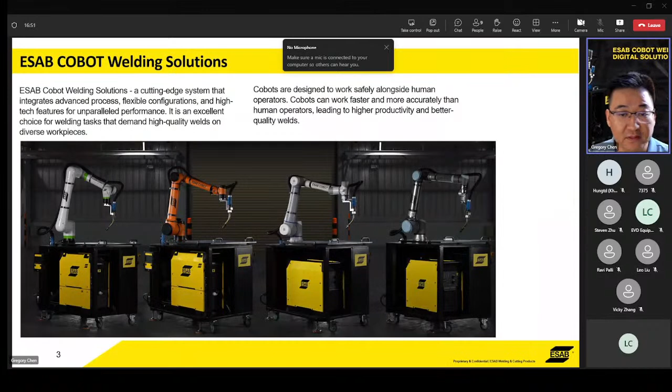As you can see from this first slide, this is generally our product for ESAB Cobot welding solutions. We include different configurations of the Cobot arms, different power sources, and hardware configurations. And as everyone knows, the reason we want to launch this new product to the market is because in recent years we've had issues like a shortage of welders and a shortage of qualified engineers.

With Cobot solutions for welding, we can increase the numbers of machines to replace manual welding, and of course increase the productivity of the welding process. Also, with the numbers of these Cobot solutions increasing, the price of the products keeps going down, which makes it affordable for owners of small-size shops to have this kind of solution to help reduce costs and increase productivity. So that's basically the reason we launched these products to help them, and meanwhile we can increase our value of revenues.

So the ESAB welding solution is a cutting-edge system that integrates different kinds of processes and flexible configurations, along with high-tech features, including our own ESAB products. It's a very good choice for welding tasks that demand high-quality welds on diverse workpieces. It's designed to work together with people—that's why we call it Cobot, collaborative robot.

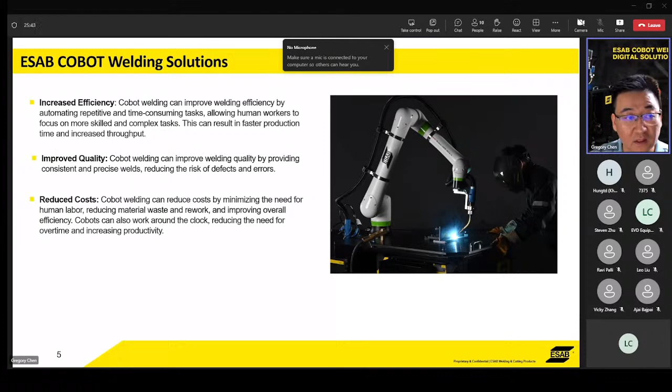Cobots can also work around the clock - 3 shifts, 2 shifts, depending on your workload - and they don't need to sleep. This reduces the need for overtime and increases productivity, and in the end it's the same result: reduced costs. So those are the 3 benefits of the Cobot welding solutions.

Next, enhanced safety - that's one of the biggest features of Cobot welding. For robot welding, the industry robot, people always worry about safety, because that thing can really injure people badly, and sometimes can even kill people. We've heard a lot of news about this.

So for the Cobot, the reason we design it is that it can collaborate with workers. If you touch the Cobot, or the Cobot touches you, the system will respond immediately the next second and stop immediately. This reduces hazardous tasks in the workshop, such as welding in confined spaces or high temperatures, so you don't need to worry about safety.

The Cobots also have different safety features - we put in sensors that can detect when a human worker is nearby, depending on which model and options you choose for the safety measures. This can immediately slow down the process and prevent collisions in the next seconds. So enhanced safety is definitely a feature of the Cobot.

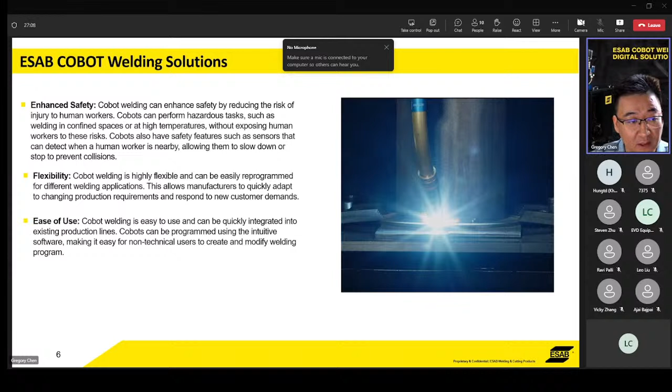The next one is flexibility. Cobot welding is highly flexible and can be easily reprogrammed for different welding applications, and we designed it to be as compact as we can.

The benefit is that you can have this trolley-type design Cobot deployed anywhere in your workshop, easily deployed near your workplaces. This allows manufacturers to quickly adapt to changing production requirements, and it's easy for programming.

For different kinds of product structures, you can easily do what we call dragging programming. The operators take up a couple of minutes, typical time to do the programming. So it doesn't matter how many kinds of products you have, it's easy and good to go. That's the flexibility, either from requiring limited space in the workshop, or from handling different kinds of products. The next one is easy to use.

As ESAB, we design a lot of templates for programming that's embedded in the system. We want to reduce the programming work as much as we can and provide ease of use to the customers, so it can be quickly integrated into existing production lines and take less than a couple minutes to do the programming. It also uses very intuitive software, so you don't need much technical background. Anyone in the workshop with a little welding experience can create and modify a welding program. That's a very good feature for customers.

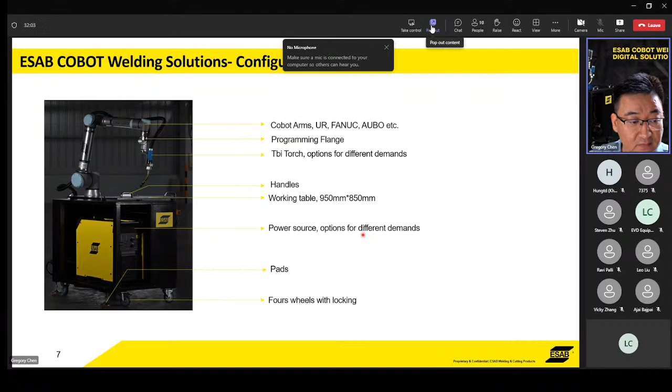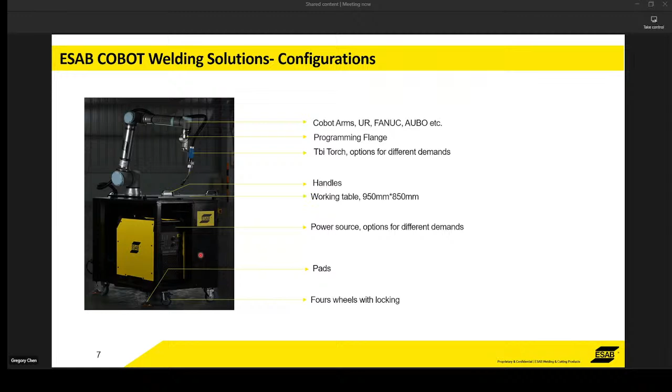Then we have the pads - you can see two here, and two more, so four pads total. When the trolley is in position and ready for welding, we always lower the pads to the floor to make sure the trolley has good contact with the floor, keeping it stable during the motion of the Cobot. We also have four wheels with locking functionality, so when it's in position it locks there, again to ensure a stable position with no vibration during welding.

And then we will look from the back side of the whole machine. Here is the copper grounding point. You will connect your ground clamps to this point. This point can move to anywhere on the table, so if you have some bigger size parts, it will be flexible to anywhere and will not prevent any space of your parts.

Then we have the W82, that's the welding data unit. This configuration is for Aristo 500iX, and W82 is the communication box for talking to the Cobot. It supports different communication protocols like Ethernet, EtherCAT, Ethernet IP, DeviceNet and ProfiNet. So it can work with different kinds of arms, either Cobot or robot. That's a very typical ESAB product for robotic solutions.

And then we have the U82, that's the touch pendant, or we can say control unit. All the parameters are set up to the power sources via this U82, and you can set up the voltage compensation, the control of the wire speed, the different arc-on and arc-off parameters, and also set up different processes for different material. We also have the synergy lines embedded in this U82 that allow you to work in a smart way.

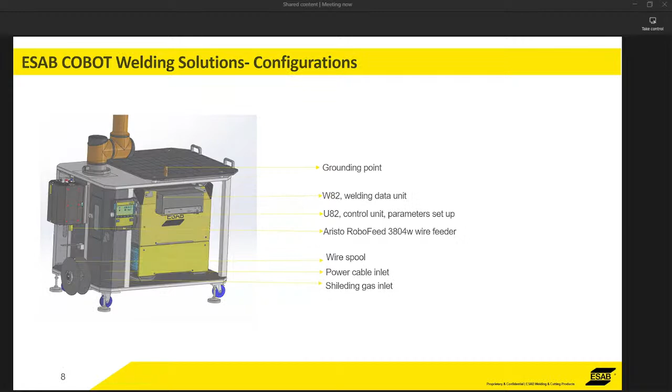So next one is the introduction of each sub device, like the power source. That's very standard from ESAB, the classic power source is the Aristo 500iX. I will not go into this number by number, because this is our standard equipment and these are the specs. You see the mains voltage, and the process support is MIG and MAG, and most of the time we use this for the Cobot welding process. Then the open circuit voltage, the power factor, and of course it depends on the requirements of the customers.

We can have Cool 2 cooling unit, so it's integrated with the power source together as one unit. And sometimes if the welding process is not that heavy, we can also provide just the Aristo 500iX as the single power source. So it's a portable heavy industry power source.

It supports different kinds of process. Besides the standard, like pulse and super pulse to reduce the spatter of the welding process, it also applies for aluminum, titanium welding, different kinds of material it also supports. So it's a very good power source.

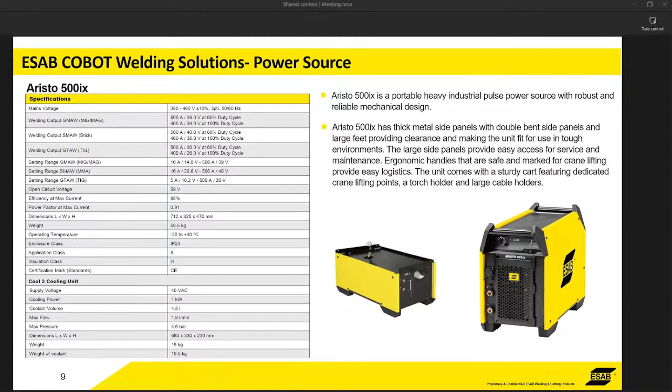And with the Aristo power source, we also have the Aristo RoboFeed 3804W wire feeder. So this is the one to work together, and with these specs it's almost a very standard product from ESAB. You can see here the voltage 42, and this voltage is supplied by the power source - you don't need to have a separate power source.

And you will see it's speed control, it's pulse encoder, so you will have very accurate speed control according to the demands of the PLC or robot control. Wire speed is very stable and fast, up to 30 meters per minute. And it will work with different kinds of material, wires, and different sizes of wire, with standard torch connections, EURO.

And these are basic, very general standard data for the spec and order information options. Of course, you can have different either air-cooled or water-cooled interconnection cables between the RoboFeed and also the power source. So the design is very robust. This can work anywhere in the workshop. You just put that to work as you expect it.

It's four roll wheels design in its feed mechanism, so grooves in both feed and pressure rolls give stable feeding and low wear of the wires. This is a very good design compared to the previous generation, that's the 3004W. One thing is that the whole package is delivered with these rollers. So when you order, if you want extra, you order one set of rolls, otherwise it's included already.

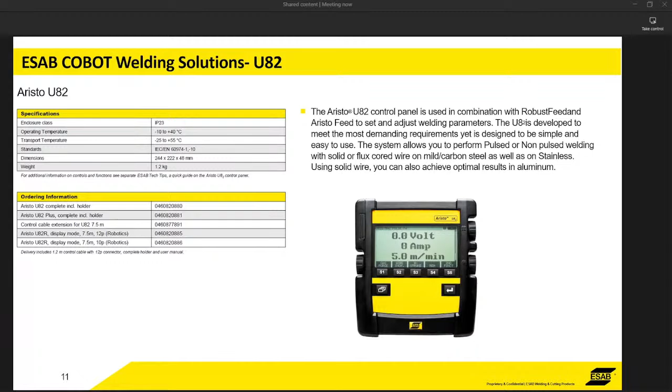So basically, these Aristo products are the advanced package for Cobot welding solutions of ESAB. Next, I will go to a more standard, more price-friendly package. That's from the ICFC products, and we call this Transmig 500, 400 series.

Of course, this can go to like 360 to 460. It's a wide range of power supply depending on different countries' power supply. So we have different options for the power supply like this. One thing is the power factor, it's very good for efficiency of the power. And OCV, 80 voltage, rated power - so all this data supports the welding process.

It's pulse, double pulse, and GMAW, gas metal arc welding process and material. They also support mild steel, stainless steel, aluminum, and wire diameters are okay. And those are the ordering information, you see that.

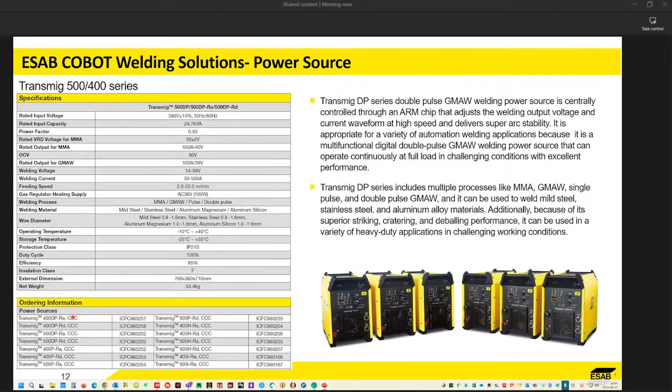Next one is the Cobot arms. So here we have three pictures, that's the Fanuc arm, universal arm, and the local brand Cobot arm. Actually, we can have more than that, so we already listed here. It's also from Yaskawa and also ABB, and we can also have the Cobot.

That definitely depends on the customer's preference, because sometimes they want to keep their own systems as the same brand to get more service and spare parts to save cost. So we provided different selection options for them to have. If you take a look at the data of these arms, the reach of the arms is normally like 1.3 to 1.4 meters. And then the payload is around 10 to 12. It's very good for arc welding, actually it's good enough for arc welding.

And sometimes we have some customers asking for laser tracking functionality for the Cobot, and they ask ESAB if we can do that.

The answer is yes, we can do that because we have more payload, and we can put our laser tracking systems, the laser head, in front of the head that's attached to the torch. That's a more advanced feature, and of course it'll be a little bit more budget for the configuration. But technically speaking, we can do that, and we have done that before.

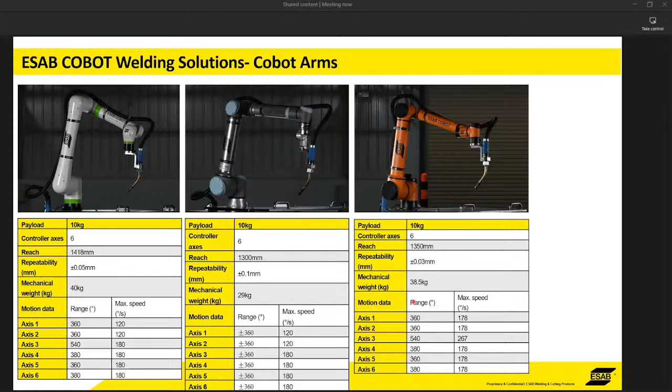Next is the torch. We have TBi torch assemblies for the robotic or Cobot welding solutions. It's definitely up to the customer - we can provide different configurations, like the angle of the torch, standard 0, 22, 45, 36, whatever, and the length of the torch, for mild steel applications, stainless steel, or aluminum.

We also can provide the cleaning station to provide the functionality of cutting wires, spray oil, and clean the internal surface of the nozzle to reduce the consumption of material. So we are all good to provide the whole package to the customers on the torch side.

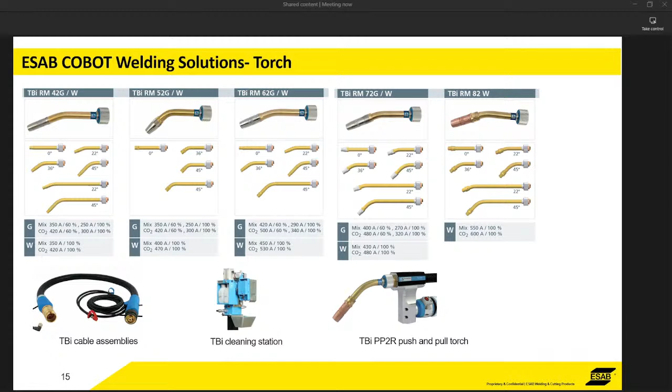The next thing we need to talk about is the features - that's the core value of the Cobot besides just welding like a human. The first one is touch sensing, and these features are not applied to all Cobot arms; it depends on which arm you select. For example, if you select Fanuc as the Cobot arm, it will support all these features, because for ESAB power source, we are all supported, and Fanuc supports all the features.

For Universal Robot, it will support a portion of the features, and for the local brand, it will support another portion of the features. We need to keep this in mind - when we talk to the end user, we need to understand what they want: the whole set of features, or just part of them, or just to replace the human arm and weld. This can lead to different selections when we do the configurations.

The first one is touch sensing. So what is touch sensing? It's a feature, as you see in the picture, that allows the robot to detect the start point and end point, and especially the middle point of the whole path. Sometimes when the repeatability of the parts is not good in position, you will apply touch sensing. Normally it will touch like this - this is the path of the touch sensing. You'll see the first point, then it will touch basically 3 points: the wall, the floor, and the point for XYZ, and here on the side. So you touch from here, move here, then touch here and here - 3 points: 1, 2, 3.

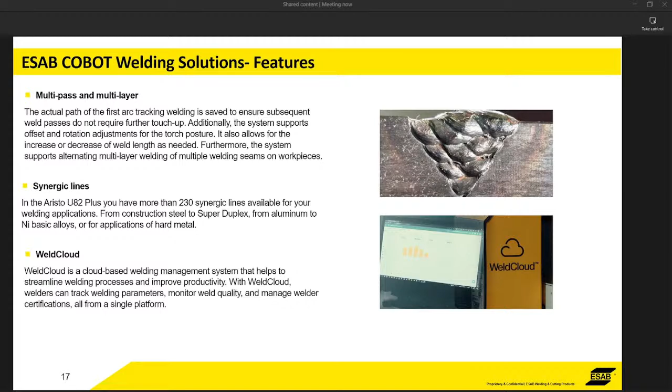The next one is the features of the software. Normally when talking about automated welding systems, people are afraid of the programming. For ESAB solutions, our software features aim to make this job as easy as possible, so we provide different templates for the customers and operators. This is the work that can be done through ESAB's interface embedded software.

As you can see here, we have the template for linear welding, which is the easiest welding process. Then we have the template for circular welding, and then touch sensing welding, arc tracking welding, weaving welding, and multi-pass and multi-layer. Those are the templates. For the operators, all you need to do is drag your Cobot arms, the TCP of the wires, and do the touch-up. All the other setup is already pre-programmed in the template.

And then we have the programming flange that I talked about before, in the beginning. That's what we have here, and this is also a pre-programmed interface, which makes the program much easier than the traditional way.

Next we need to talk about other features, the extent of the welding itself. We can add laser cleaning functionality for customers that require more. Laser cleaning is used to clean the oxide layer and dirty stuff on the surface of the material and remove it. We have a laser head that can be put in front of the welding torch to do that work, or we can change from welding torch to laser cleaning head.

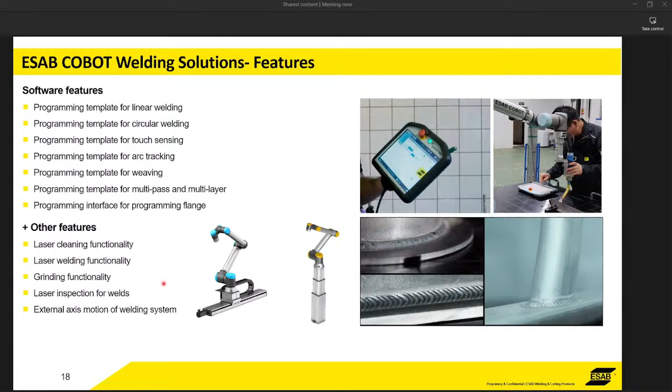Next we need to talk about segment applications for industries. Customers always ask if this is good enough for their industries and applications. One thing to keep in mind is that the Cobot solution is to replace the arms from a human, not to replace industrial robot applications. For industry applications, robots are more complex and can handle bigger parts and more complex geometry, designed for big jobs. For Cobot, it's always small parts, small jobs, small companies, not giant companies. Here we list typical industries that Cobot welding solutions can penetrate.

The first one is general fabrication, like small parts such as motors, pumps, propellers, and ladders. We also have structural steel fabrication like small beams, and transportation and railway industry small parts. You'll see a picture here - that's a part in the subway, the end wall, around 2 meters. We can put the Cobot in the middle of this to weld it, or even use two Cobots to weld the same part at the same time. This kind of part is easy to handle.

I believe everyone should have already returned for the second half of our meeting. Before we start, there are still a few questions that haven't been answered.

Yes, I will try to answer these questions before we move to the next session. So the next question is, which robot has ESAB China worked most successfully with? Well,

So I would recommend - I think Samuel, you're referring to Cobot, right? So I will refer to Fanuc and also Universal Robot, UR. Those two brands cover most of the welding features, which is good for customers. And of course, the prices are a little bit higher than the regular ones.

And the next one is, from EVD equipment, what are the advantages of the Cobot solution compared to others? If you mean others means the manual welder or the other robot solutions, there will be definitely two typical answers.

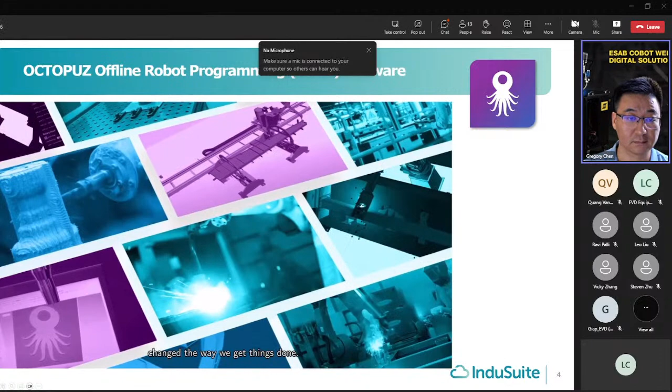Think about how much offline robot programming has changed the way we get things done. It's made our work easier and more efficient than ever. It's been revolutionary. But this revolution has created a new job: programming your robot cell's next task offline. And if that step becomes a bottleneck because of bloated, unnecessarily complex, outmoded software, you can't fully realize the promise of OLRP. That's why we've totally rethought the software that makes our OLRP go. Meet the next generation of Octopuz, the most easy-to-use, elegant offline robot programming software ever made.

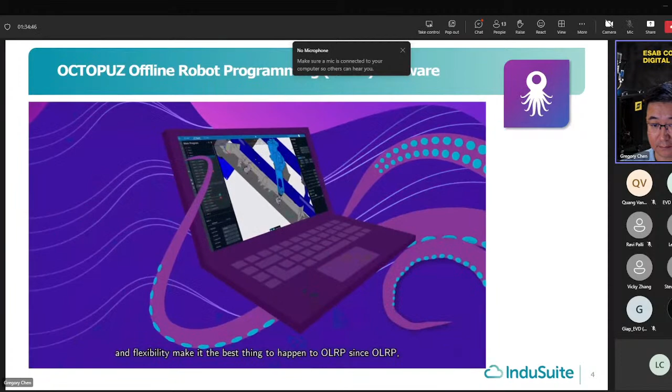Its speed, reach, and flexibility make it the best thing to happen to OLRP since OLRP. Its intuitive, modern interface lets you easily program and run multi-robot cells from just about anywhere. Octopuz features flexible, user-based accounts, and you can feel confident knowing our expert team of applications engineers are ready to assist your next project with their unmatched training and support. Octopuz is here to put your business 8 steps ahead, so you can go places your competitors haven't even imagined yet. And when you're ready, we'll help you get there.

That's an introduction clip from Octopuz. Think about it. So here is what Octopuz is.

Octopuz is offline robot programming software that enables complex robot applications to be programmed in a virtual offline environment without disruption to your manufacturing process. Basically, Octopuz creates a digital twin environment for your project. You need to load in your robot cell template and also parts. By template, I mean you need to provide the CAD file of your system, including the robot, the external axis, the rails, and also the parts. Provide these to us, and then we will build the digital twin environment for you to do the programming. Next, you can program your part efficiently with integrated tools.

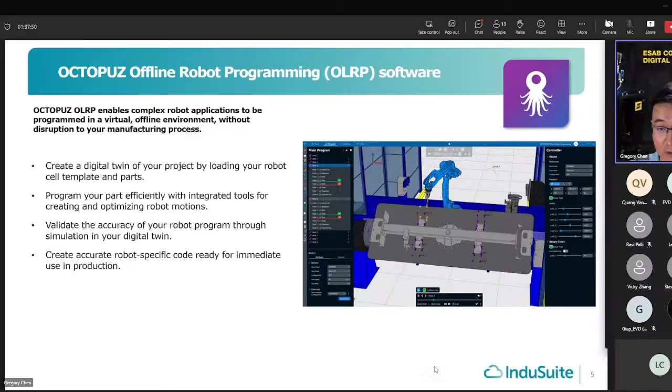That's the first one. Then next is improving programming efficiency, because when you do touch-up, you don't see the whole picture of your system. But when you do this in the virtual replica of your real-world cell, you will know exactly and identify the optimal tool path, and optimize the path and the programming.

The next one is about robot brands. This can eliminate the need to purchase different software programs for different brands. For example, in your workshop, you have different brands from ABB, Kuka, Fanuc, Yaskawa, etc. When you do offline programming, if you want this functionality, you'd either buy software from their OEM, since they have their own offline programming software, that's for sure. But with Octopuz, you just need to buy Octopuz, because Octopuz will work with all these brands in one cell. This can save a lot of learning costs, and also the physical costs of purchasing different software from different OEMs. That's definitely a good benefit.

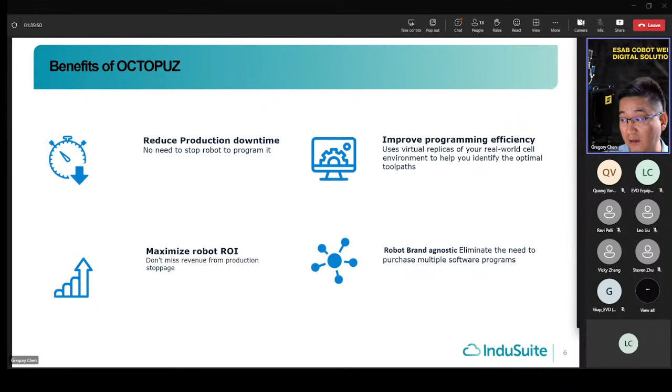The next one is simplified complex programming. When you do programming, especially for very complex geometry, touch-up is sometimes not easy. With offline programming, the system will determine the path and the geometry of the parts from the file automatically, so it's easy. You don't need any experts for programming, just click some points.

The next feature is automatically detecting and avoiding errors. Octopuz offline programming can detect collisions and avoid errors such as reachability issues of the arms. When you have these errors, clicking a function button lets the system automatically correct and make a new path. This can save a lot of headache.

The next one is programming robot systems with complex configurations. This means we have different rails like positioners, racks, and gantries with the robot. It's good to go with these complex hardware configurations. It supports external axes, all working together in a synchronized motion way.

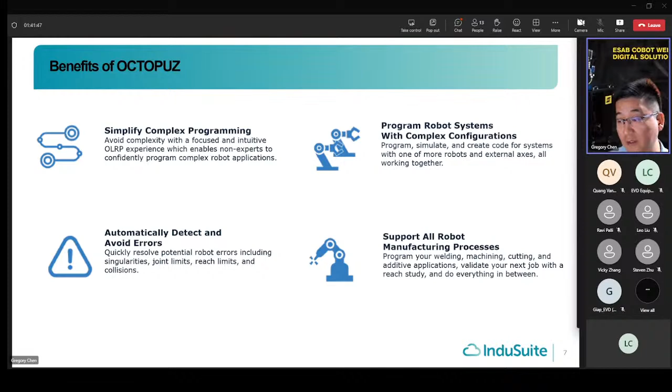So next, it's always interesting and important to look at applications - what projects we are working on and what projects Octopuz is good to fit.

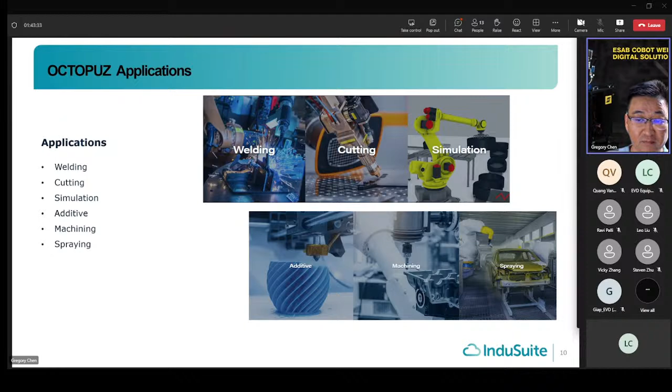As mentioned, here is welding, cutting, simulation, additive, machining, spraying - they're all good to go for Octopuz, supporting different applications of robots and also Cobots. You'll see here we support the big family: ABB, Fanuc, Kuka, Yaskawa. We also support other brands like Cloos, Kawasaki, OTC, Panasonic, Stäubli, Universal Robots.

Most of the projects we have done over the years - I think we've had experience of more than eight years with Octopuz, even before ESAB acquired Octopuz. Normally we work with Kuka and ABB, so that's what we can do. For others, we are working this year also with Cloos - Cloos is a little bit special for the postcode, and also for other brands. So we support most of the robots in the market.

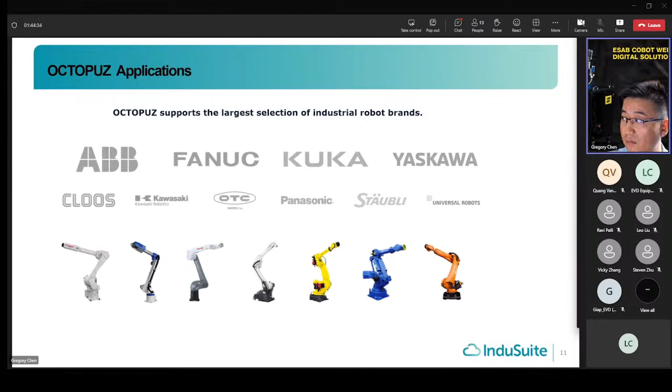We have some special calculations and special formulas in the software. You just type in the length of the stitch and the length of the space, and it will automatically deploy the program for you.

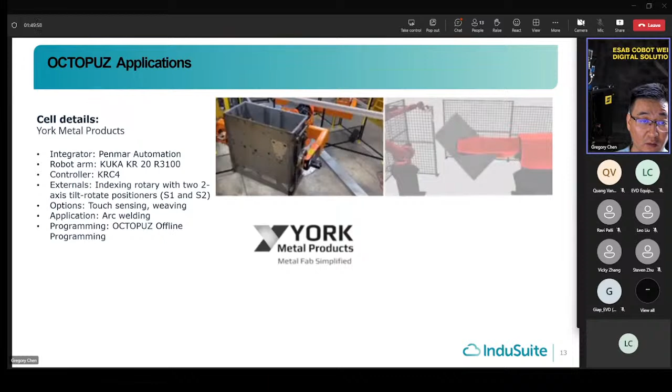Next one is the applications. We have a lot of applications for Octopuz in the region, also globally. This one is from Canada.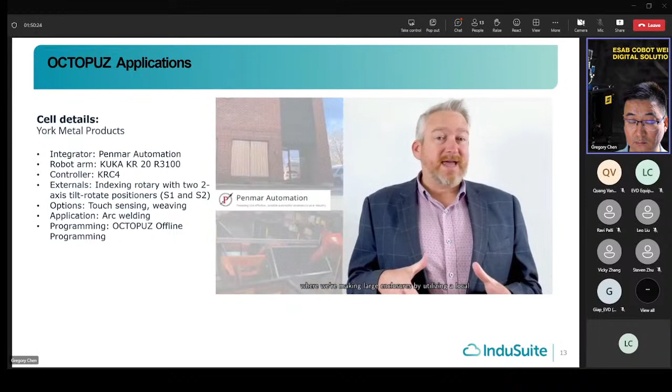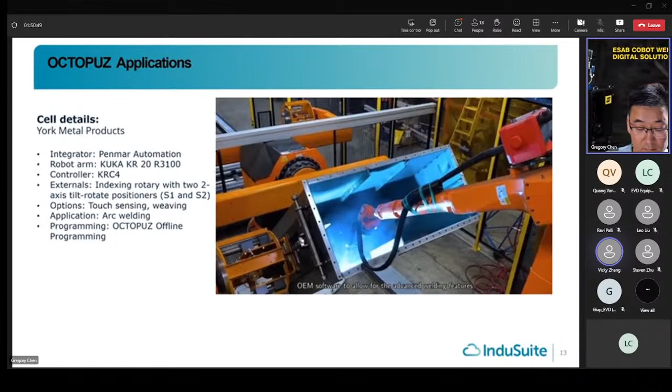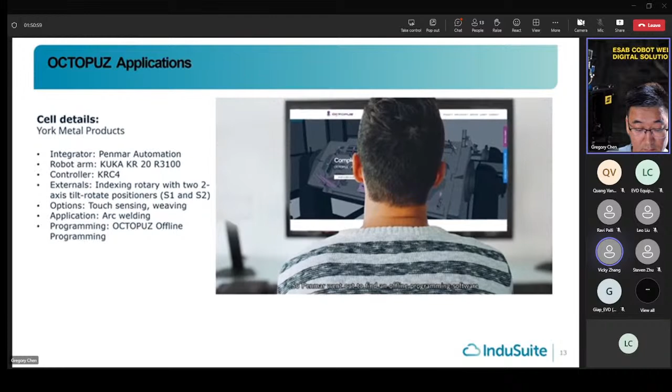Hi, Steve Leskew again from York Metal Products. For this installment of Partners in Processing, we're going to be exploring how Penmar Automation found a programming solution for our robotic weld cell, where we're making large enclosures, by utilizing a local Canadian software company called Octopuz. Hi, my name is Rob House, and I'm the head of technology for Octopuz. Octopuz is an offline robot programming software to program industrial robots for applications like welding and cutting. We were introduced to York Metal through a company called Penmar, who is a robot integrator. Penmar quickly realized that we needed to augment the native OEM software to allow for the advanced welding features to be added offline, which are required on our complex enclosures that we manufacture. So Penmar went out to find offline programming software with the advanced features required, so they don't have to be manually added on site, taking significant time and additional costs. After researching a number of third-party offline robot programming solutions and comparing features such as compatibility with our robot, technical support offering, implementation schedule, and overall cost, Octopuz stood out as a world leader in this space and are a local Canadian company as well. Having flexible and better yet local partners was key to the design, build, and programming of York's robotic weld technology. Thanks to the collaboration between York, Penmar, and Octopuz, we were able to dramatically improve on programming robotic communication, ensuring effective production cycle times to support our customers' quality and delivery expectations. Thanks again for taking the time to watch York Metal Products, Partners in Processing. If you have any questions or would like to learn more about how York Metal Products can assist your company, please feel free to call me directly.

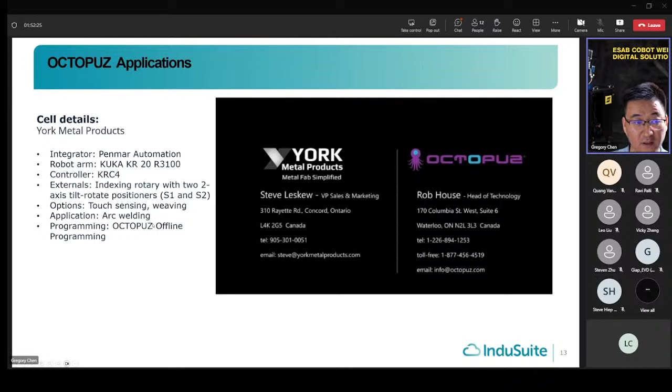So this is the KUKA system, the KUKA robot system, and you will see we'll have externals, rails, and positioners. We'll have different option support. And the next one is not welding, it's grinding and polishing process.

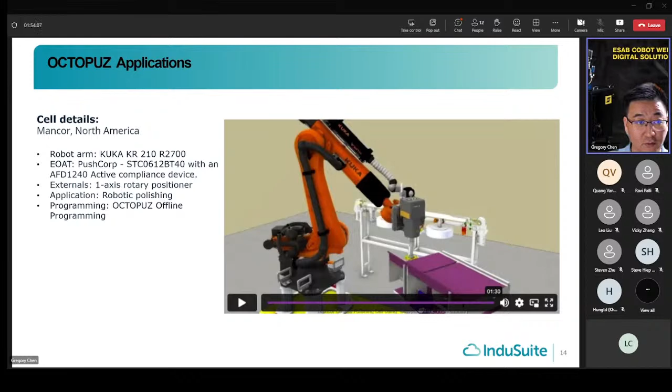The next one is a reference in China. That's laser welding, and you'll see this KUKA KMC solution. We have 4 linear axis and 3 rotary axis, and we use Octopuz offline. The system dimension is 40 meters by 3.5 meters wide stroke. And you see the parts here.

It's complex, with a lot of stitch welding, hundreds of seams to weld. So if we do the touch-up the traditional way, programming is a big headache. Then we use offline programming from Octopuz to do the job.

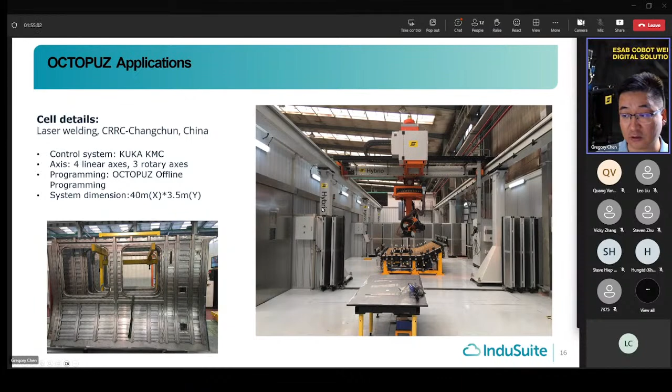Let's take a look at the video. So this is the simulation. When we have done the programming, we run the simulation and you will see all the paths. You can also inspect if this welding sequence is good enough for your process, because you need to consider a little bit about distortion. And this is the weld in the real world.

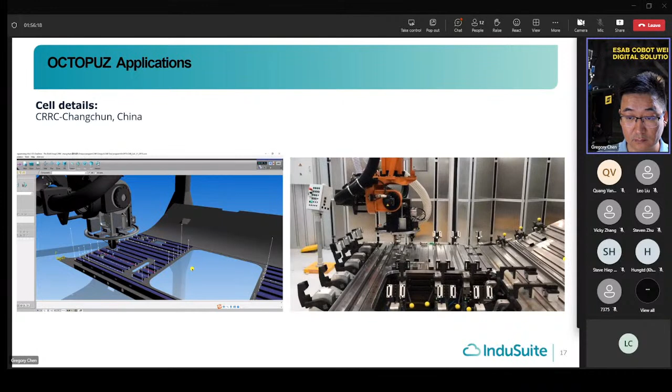So the next one is also a project in China, the Chinese next generation transportation system, the maglev transportation system, with a speed of over 600 kilometers per hour. We are very proud to be one of the providers for this project.

ESAB provided the welding system for the aluminum body of the maglev, and we used Octopuz software to do the programming for the whole parts. You'll see the parts laid down on the fixture, and we do it all by software. This is a big project, 70 meters in length and 4.5 meters wide stroke. We use Octopuz to handle all the process features, including welding, laser inspection, and laser cleaning.

So next is Octopuz's target customers and roles. Normally we have end users and robotic integrators, and those are our two ideal customer types. We prefer, or recommend, having robotic integrators as customers.

From their perspective, it's high mix, low volume, complex geometry, large parts, any robot brand, and the old programming method is OEM software dependent. So we can convince them to replace that with Octopuz and solve the bottleneck caused by programming time.

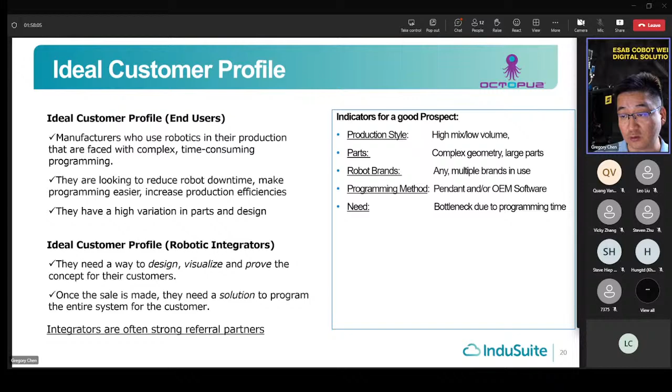We also have regional support - you can reach either me or Patrick. We can support you on how to do the programming, how to post the code. For pricing and terms, again, you can reach Leo.

One thing to keep in mind is that as a customer you can apply for a trial license - it's available. You can use it for one or two months, then decide afterward whether to buy it or not.

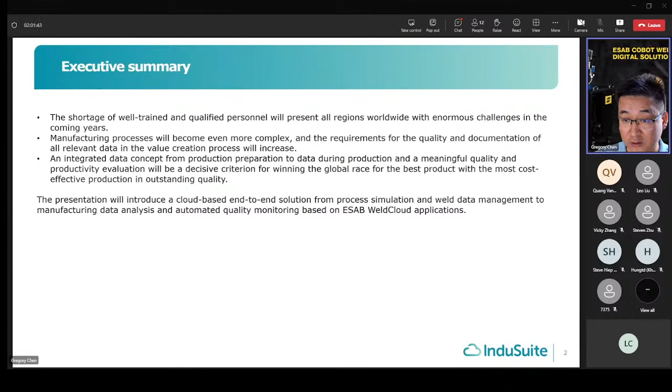InduSuite is the first open manufacturer cloud-based welding machine and data management system for welding and cutting technology, for the fabricators. You will see from the web page InduSuite, including WeldCloud products and also cloud products, Octopuz, Cobot, and this kind of software products.

It will include all the process like preparation, including the welding notes, which will have the functionality of WPS documents, WPQR documents, certificates, sketches. So basically that is management software for your paperwork, also your certification and qualification of your welders.

Then we have the simulation. We have, as I introduced just now, the robot programming software, offline programming software, Octopuz. Then we have the simulation, which we call Simufact, and that is from a partnership with Hexagon, also a Swedish company. We work together and integrate their system to do the simulation of the thermal stuff during the welding process, during the simulation.

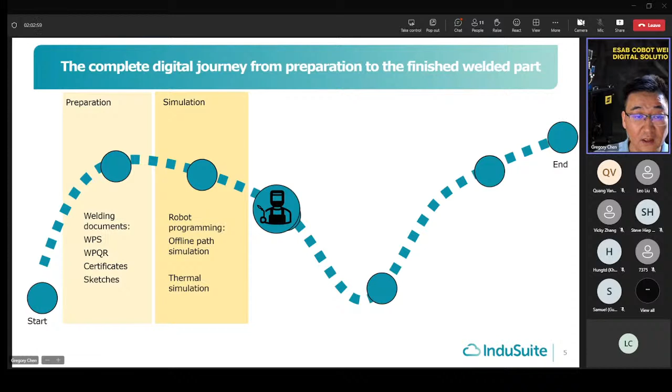And then we have the implementation process. That's the quality compliance with parameters, tracking, quality improvement. And then we have the follow-up, that's the service: calibration, validation, and repairs of the welds.

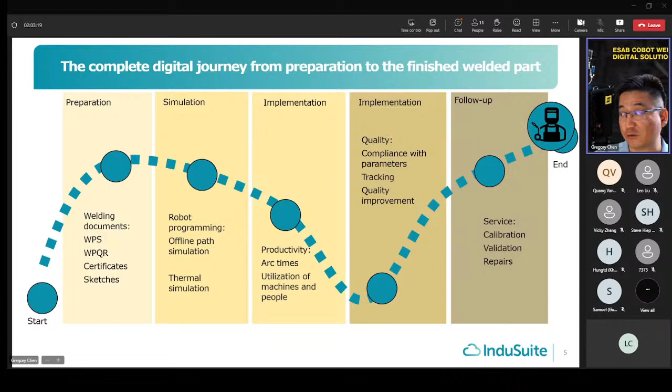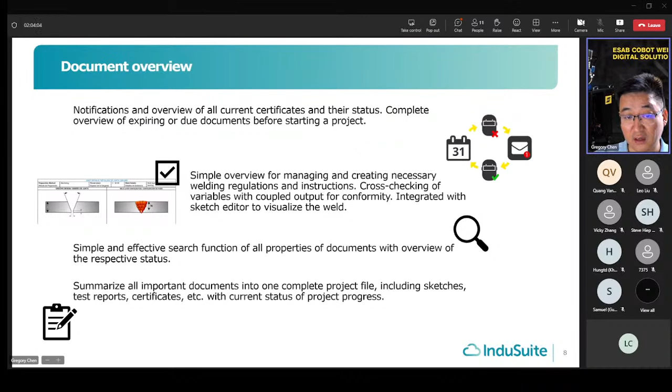Then till the end. So first one is the before welding. It's the document management - this is the WeldCloud. Functionality is to record and manage your documents of PQR, welding qualifications of the welders, compliance issues management, document search and archiving, the logging functionality and traceability of each weld, each session. Then you have the overview functionality of all your documents, so you know exactly who is doing which work on which day and what quality and what certificates he holds, and all will be stored in the cloud, so you can access it anywhere with the internet.

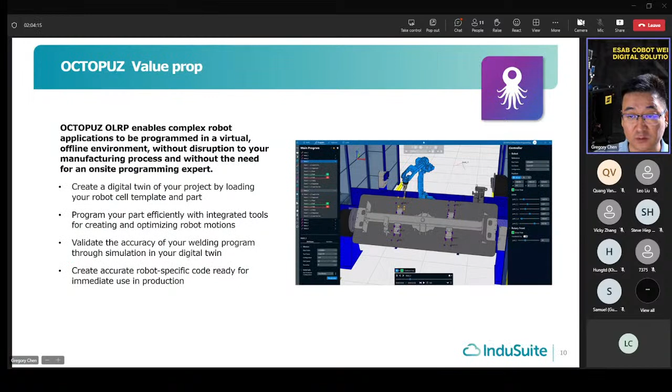Next one is the simulation of robots - this is the Octopuz we just had. Next one is the Simufact value, and this is very good software. It can do thermal simulation of all the processes like MIG, TIG, laser, EB, resistance spot welding, frictional welding, and mechanical joining. We calculate based on the database of thermal, mechanical, metallurgical, electrical, coupled multi-physics solver.

It can calculate when you input your welding parameters into the software, and then it will calculate automatically your thermal distribution with different colors. Then you know exactly what is your distortion of the welds, which is the most important for the welding process.

You have the built-in pre and post processing, which includes multi-phase material models and a simple to learn and use GUI. Inside the software, it includes a lot of different material databases, the properties of the material for welding. So it's very useful, can reduce the cost by simulation instead of physical works like trying out welds, enabling mitigation of distortion and residual stress, and understanding the effects of the welding joining process early in the product development cycle, long before physical prototypes and build, improving robustness of the manufacturing process. So this is a very good tool for that.

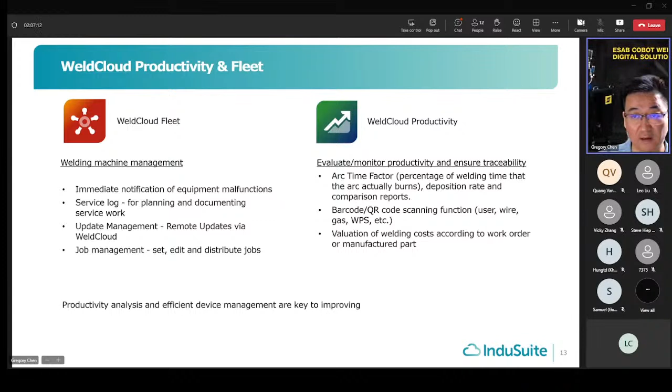WeldCloud Productivity is the tool that lets you know exactly what happened during welding - the arc time factor, the percentage of welding time that the arc actually burns, the deposition rate, and also comparison reports. You can also scan your parts and wire with barcode, QR code scanning functionality. You can scan the user who is doing the work, wire specs of the wire, gas, and WPS, etc. Then you can have the functionality of valuation of welding costs according to work orders or manufactured parts. So then you know everything during welding, you know exactly what the bottleneck is, and you know how to solve that. That's the value of the WeldCloud software.

This is a typical analysis of the cost optimization chart. Normally for welding costs, the distribution shows labor is always the big portion - labor here is normally over 80%, and the arc time factor for operating time is 20%. For manual process, arc time factor is normally from 10 to 30%, and for mechanized and robotized processes it's better than that - over 40%, sometimes reaching 90%, which is really good data. Then you know exactly where you spend your money and how to increase the return on investment.

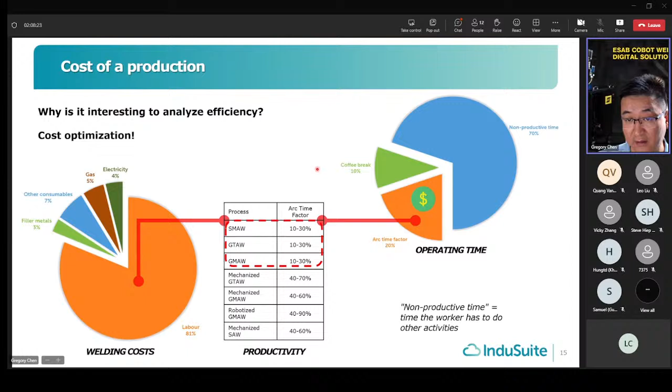So the key is the arc time factor, right? If you have more arc time factor, then you can have more working load and working productivity, then you can earn more money.

And then here's the hardware of the WeldCloud. We have the built-in, which is ready for the old ESAB products and also the new ones, such as the Aristo and Edge welding systems.

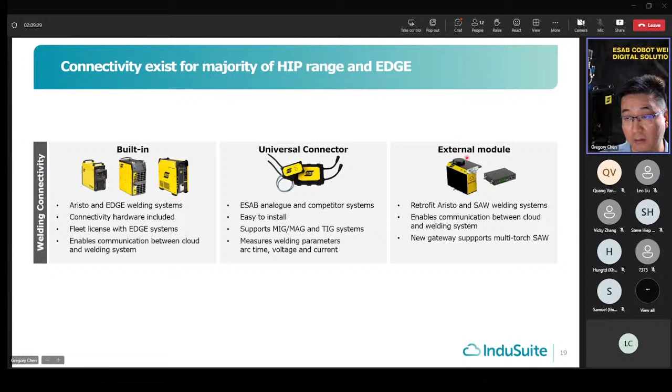Then we have the universal connector, which is a very good option for non-ESAB power sources. For example, we can sell this to other players, like Fronius or Kemppi, as long as the connector is good to go. And then we have the external module, for retrofit of old systems.

So during the implementation of the welding, we have the other tool, HKS. We have the Weld Quality Assurance System. It's very important to have an overview of the actual welding quality, right, to know exactly what the parameters are.

So basically, this system will measure in real time the welding voltage, the welding current, the wire speed, and the shielding gas flow, and also the welding speed, which gains data from the wire communication interface. So the functionality is checking and monitoring welding parameters, analysis of faulty parameters, traceability, early detection of welding irregularities, and automated processes to detect defective components.

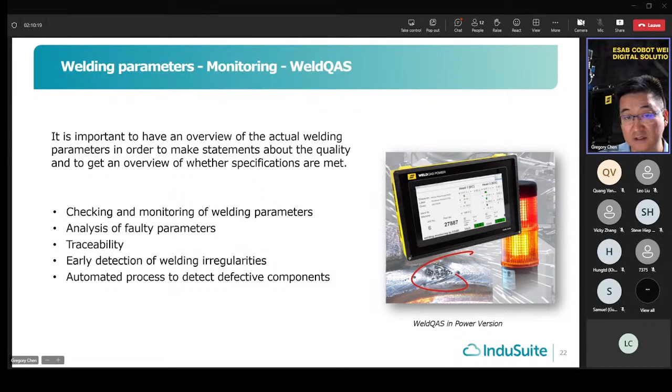So that's the functionality, and here are some pictures and references to show how that works. You see here, those are some defects. During aluminum welding, you will see the current and voltage curves. You see there's a jump there, then you know exactly, okay, something's wrong there. You will stop and take a look, and this will be logged in your database.

And a lot of customers ask if this can be integrated into their automation systems. The answer is yes. This can be done for a lot of kinds of automation applications, like MIG/MAG, TIG, resistance, monitoring of welding stations and all welding parameters, and integration to existing customer systems via fieldbus.

And this is a short clip to show the live data during welding, and you will see all this data.

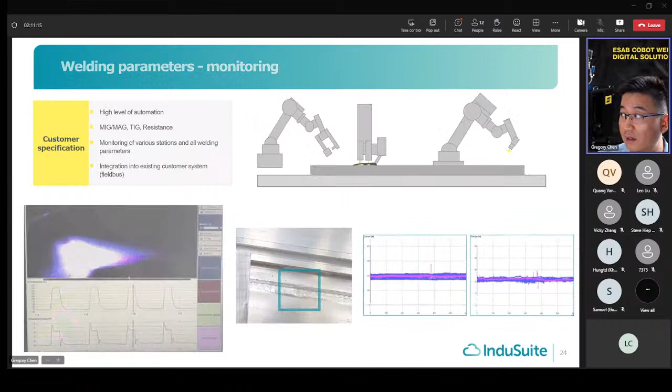And this slide is to show that the WeldQAS system ensures automatic 100% monitoring of production. And if you have some occurrence of irregularities, you will stop and try to check what happened, and then you will not produce further product defects, right? This results in less scrap, less post-processing, less test effort, resulting in reduced cost of production by increasing quality.

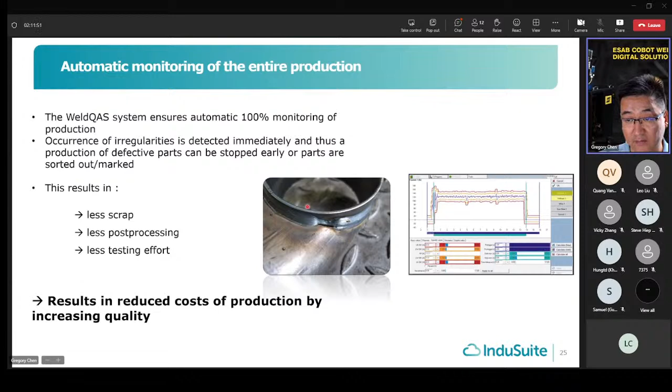And this is the graphic of the welding, so you know exactly what happened during the welding.

The next one is the follow-up, so this is after welding. When you finish your welding, you want to check your power source, your welding equipment. We have this tool kit to do the inspection of your accuracy, like the welds, the parameters from the power source. It can record welds for up to 64 hours, performing an archiving procedure, and also help in the search for causes of welding defects.

And one thing that's very important for the process is cooling down time. So measure the T8/5 time, then you know exactly what the time is for cooling down from 800 degrees to 500 degrees. That time is very important for the quality of the welds.

Then data export to other systems, you can do the evaluation and documentation. And it's digitalized, you don't need any paper. Everything is stored digitally in this little screen unit.

And then preparation of calibration records according to the IEC standard, so that's the service hardware. Then this is an example of the calibration process and also the paperwork. Sometimes customers require calibration certifications, and this is the one to provide them. Okay, this machine is calibrated, then it's good to go for welding.

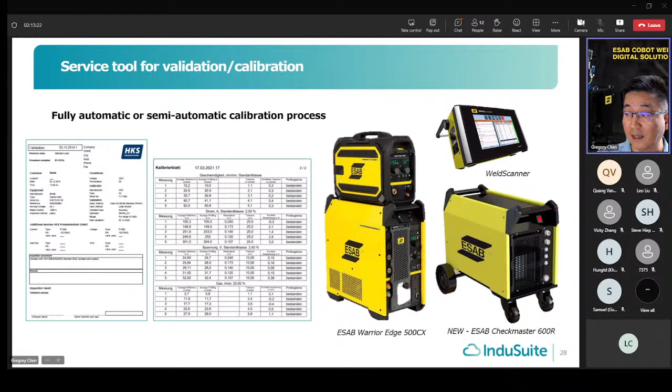And the next one is support. So we have manuals and documents from the standard ESAB manual document website, and we also have the HKS website for material.

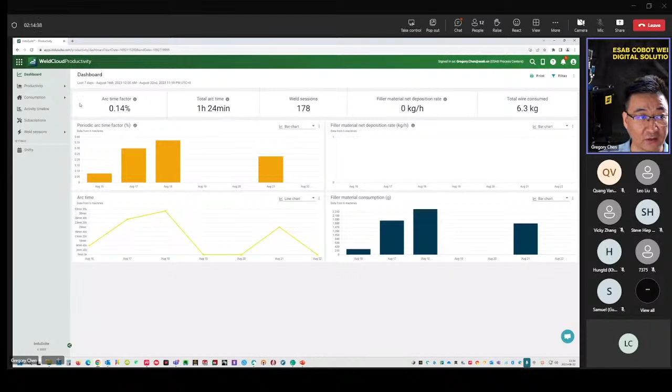I will not go into details, but this is the platform of InduSuite. We can show this anytime to any customer who has interest to use our product. We can provide a test account to them so they can explore it a little bit by themselves to see what the WeldCloud products are, and you will see all the factors and consumptions like wire and gas.

You can choose the timeline, and you can choose different size machines. I have access right now only to China process centers, so I know exactly which machine is working on which products and what the data is for that. So that's the productivity. And then you also have WeldCloud Fleet, which is the management tool for all your machines in different locations.

We can have a map view, so you know exactly where the machines are. I'll just give some time to load.

And then we have machine permissions. You can set up different machine permissions and services, and this will upgrade the software automatically. You can also have job management to arrange jobs to different welders, firmware management, machines, and devices. So basically, this is the two.

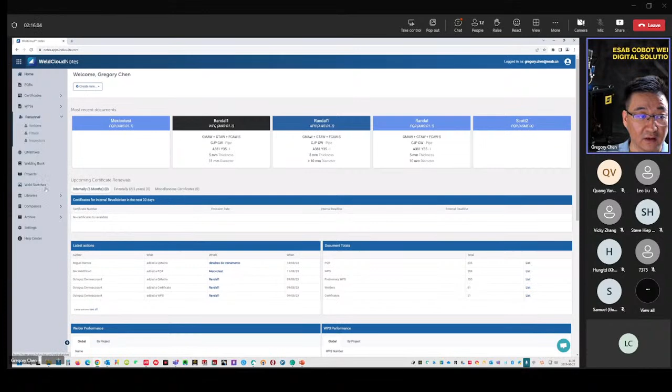Then the next one is WeldCloud Notes, and this is the management of documents, like the PQR certificates. You know exactly your status of the certificates and WPS, and also the personnel welders - it's like document management. So we're running a little bit out of time.

And I think that's all the presentation of the digital solutions. Now I'll hand over back to Vicky to see if there's any questions. Okay, thanks Gregory, for the introduction for the digital solution.

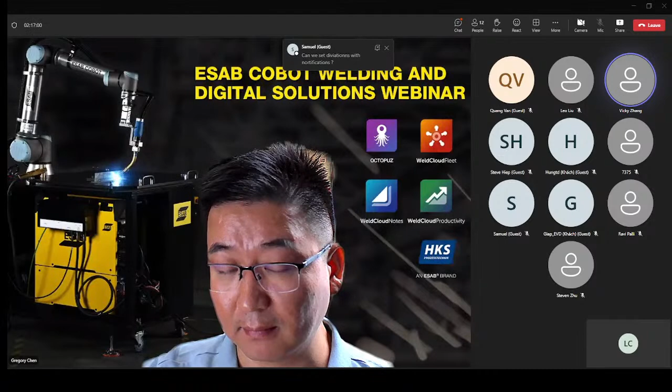Hi, thanks Gregory, thanks Vicky. So, our distributors in Vietnam - if you have any... oh sorry, I have a question from Samuel. Can we set a deviation with notifications? Gregory, sorry, this is a technical question - can you give a quick answer to Samuel, or we can address this to Samuel and our distributors. If you have any questions, you can address them to me and Gregory.